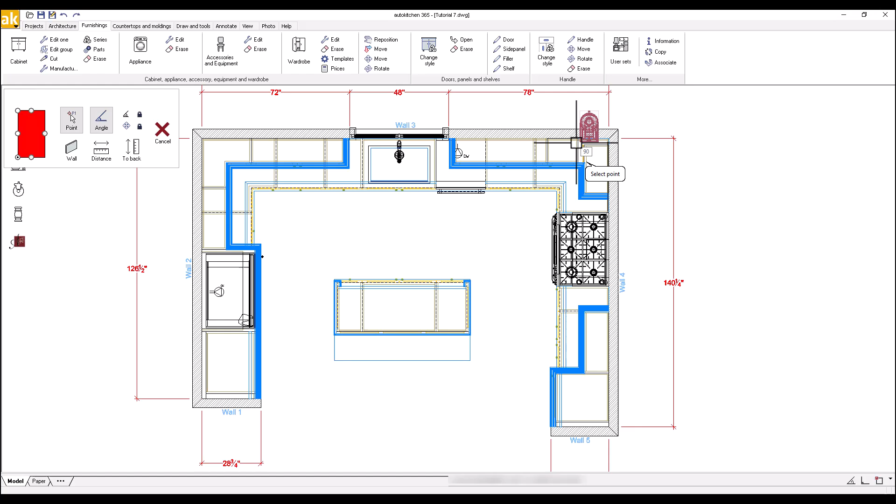In the window that opens, click on the mixer, then click on Manual Insertion and drag the mixer to the upper right corner of the kitchen. If the mixer needs to be rotated, enter the number of degrees to rotate it. Frequently, the numbers used are 90, 180, or 270 degrees. Click to place the mixer.

Then, in the second section of the same window, select Toaster Model 02 and drag it to the left of the mixer and click to place it.

Next, click on Bottles, and when the red wine bottle appears, place a check mark next to Multiple and click Manual Insertion. Drag the mouse to the left of the toaster and click 3 times to place 3 bottles of wine. Feel free to place additional accessories.

Make sure the elevation is 36 inches if the items are to be placed on the counters. Click on the red X when finished and then close the Kitchen Utensils dialog window.

Save your work. Next, click on the sofa button named Furniture and Furnishing Items and select Accessories, Decoratives and Plants.

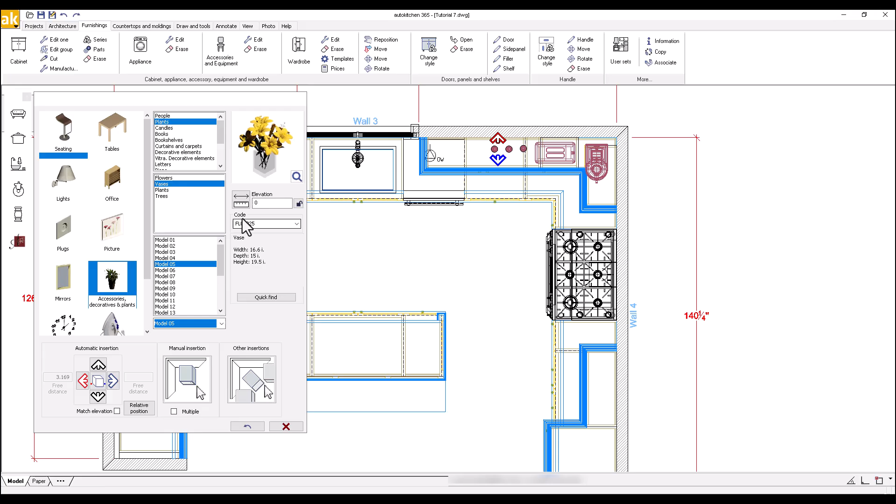Click on Plants, and in the sub-menu, click on Vases. Select Model 05. Enter 36 for elevation. Click on Manual Insertion and place the plant on the island.

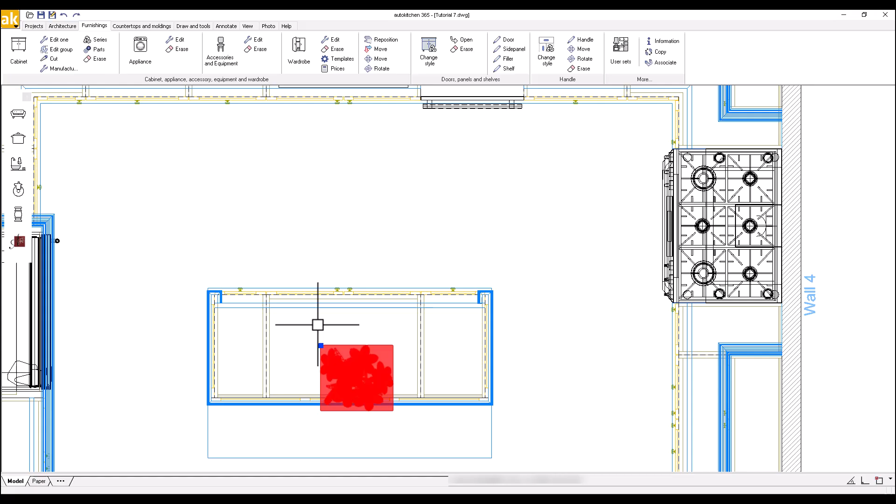Once placed, it's very easy to move the plant in any direction. Follow these steps: Left click the plant. A colored square will surround it. In one corner of the square, there will be a small blue grip. Click on the grip and move the mouse in the desired direction. The plant will move with the mouse. When finished moving the plant, left click again. To finish, press the Escape key.

Placing SketchUp accessories in Auto Kitchen.

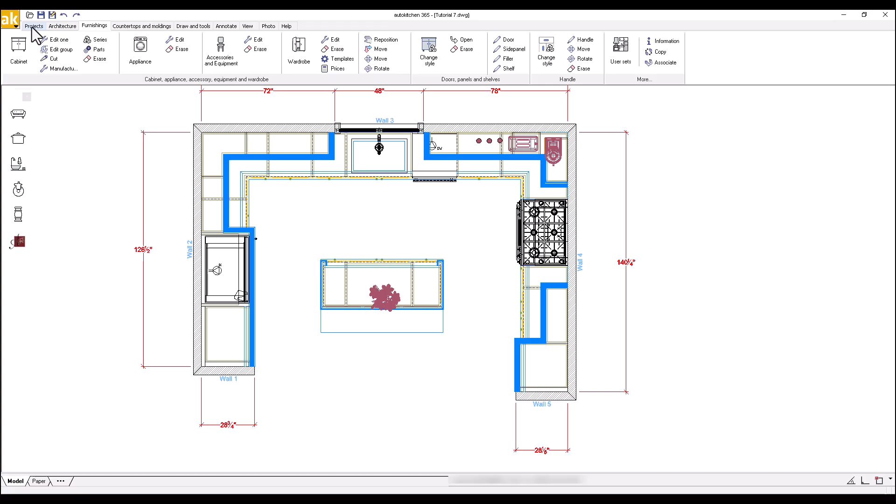SketchUp 3D objects can be imported directly into an Auto Kitchen design. The 3D objects are available online in different websites, the most popular one being the 3D Warehouse, which is free. In order to place 3D objects into an Auto Kitchen design, first download the object into your computer. If necessary, once downloaded, you can rename it to make it more descriptive.

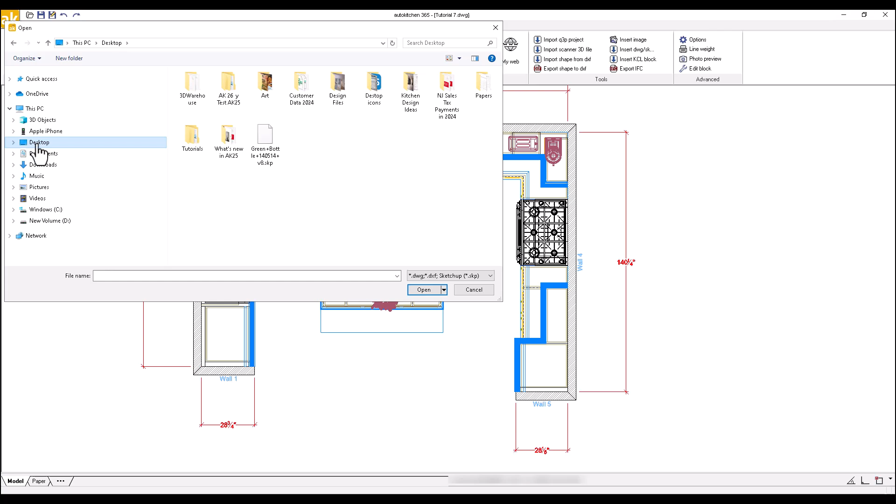We are going to place a bottle of water into the design. This object has been previously saved into our computer. Click on Projects, then in the Tools area to the right, click on the Insert DWG SketchUp File button. Next, click on the water bottle object and drag it near where the wine bottles are. Click to insert it. The 3D object default elevation is 0.

Right-click on the bottle to display the extended menu of options available. Then select Elevation and enter 36. The water bottle is now inserted in your project and will appear in your perspectives and elevation views.

The extended menu is available to all Auto Kitchen customers with a subscription agreement. Customers without a subscription agreement will get a reduced menu that includes only the first 6 items in the extended menu. One option, Scale, is particularly important as some 3D objects need to be adjusted in size.

To adjust the scale, select the object then right-click, select Scale. You can edit the inserted 3D object size in several ways. If you want to approximate the increase or decrease in size via a percentage, type the number below Scale. You can also be more specific and click the By Measures button, then enter the desired width, depth and height.

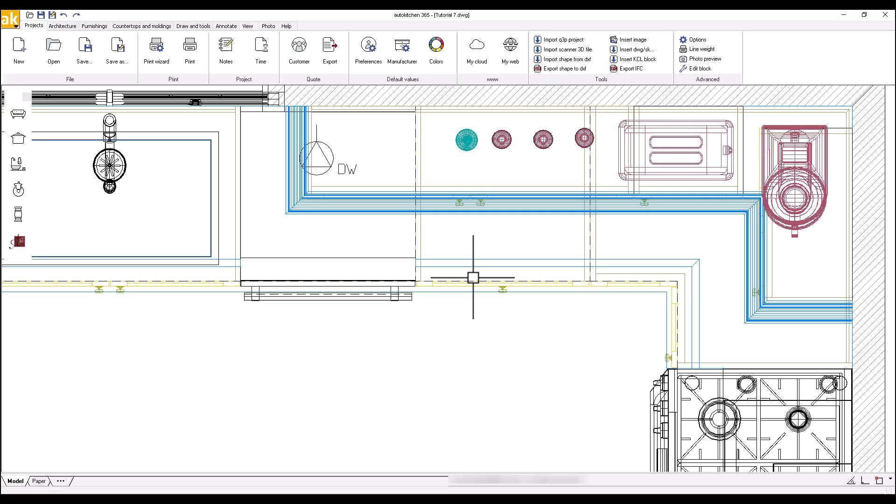Additional lights can be placed in a design to increase the image appeal. Let's place a couple of recessed lights on the ceiling. Click on Ceiling Mounted, Ceiling Lamps, Directed Light 1 and place a check mark in Multiple. In the Ruler button, edit the width and depth of the light fixture to 5. The elevation at 96 inches is the same as the kitchen ceiling height.

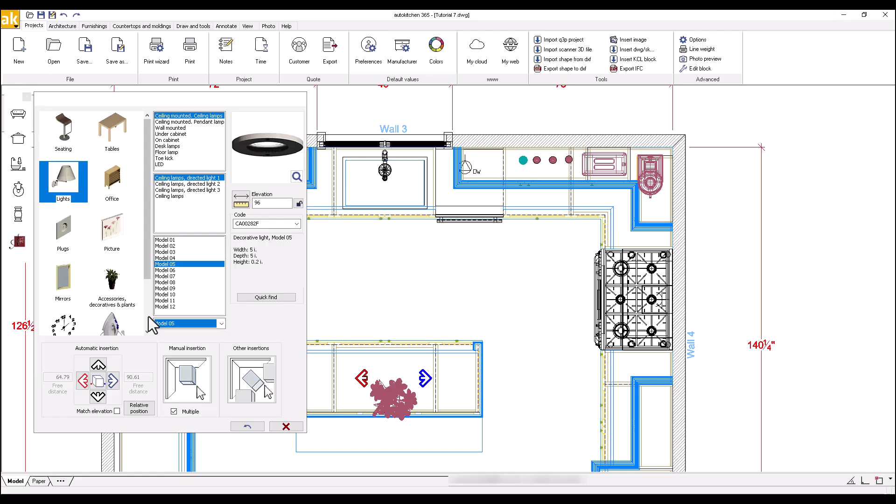Next, use Manual Insertion to place 2 lights between the island front and the cabinets on the window wall. Name them Can and when prompted, enter 0 for intensity. When finished, close the accessory insertion window and save your work.

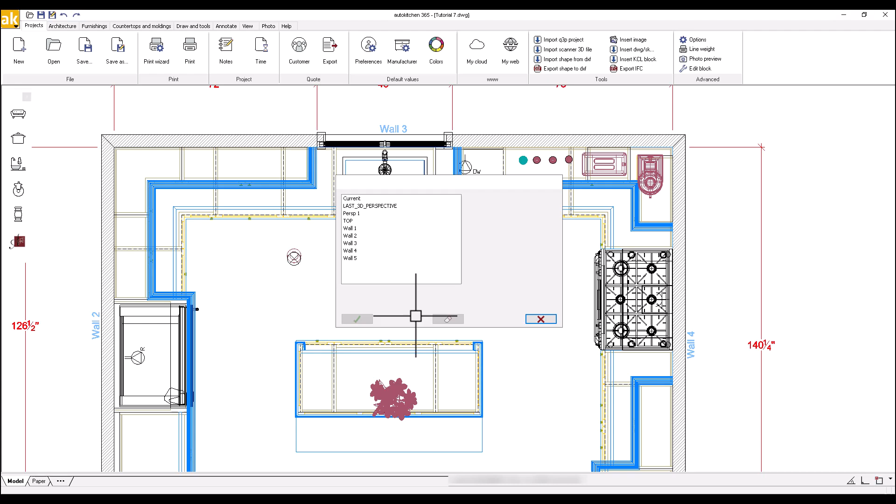Right-click and select Load View and then click on Perspective 1 to create a new render, now that we have accessorized the kitchen. To increase the resolution, click on Resolution and select 1920 by 1080 from the pull-down menu in the new window. Then select Medium for the render level and click Render.

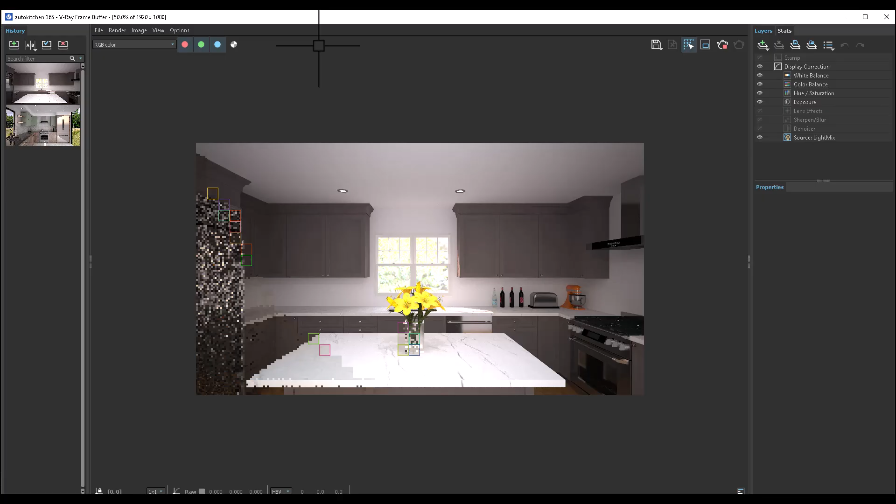Notice how the can lights look illuminated even when their intensity is set to 0. You can save the render using the Save Current Channel button at the top, or let it be part of the render history. Compare the two renders, the one in fast and this last one in medium and higher resolution. Note in particular the differences concerning the looks of the glass flower pot on the island, the dishwasher, and the refrigerator. The medium render is more polished and accurate.

This concludes tutorial 7. Save your work. Thank you for listening.